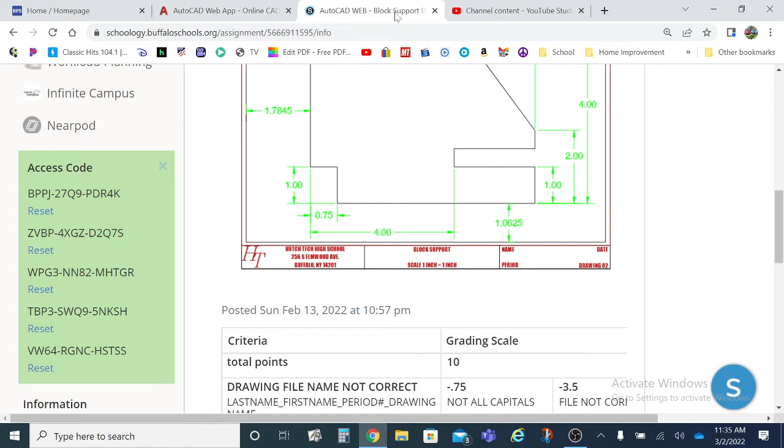First thing I'm going to do is use the offset command. I am going to reference two measurements. All right, all three of you, zip it. We are looking at these numbers here: 1.7845 and 1.0625.

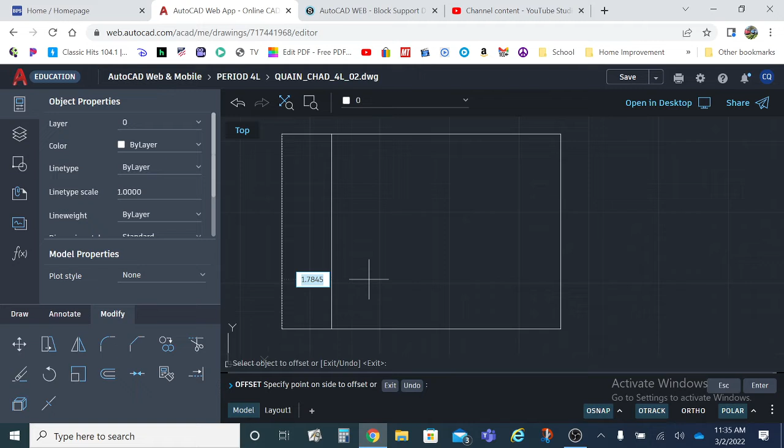I'm going to use my offset command. I'm going to type in 1.7845, enter, select my object, give it a direction, left click. Again, I'm screen recording this so you can always go back to it and look at it, okay?

Next I'm going to repeat the command. There's a couple different ways I can repeat the command. I can either right click and go repeat command, hit the space bar, hit the enter key, or simply select the item. I'm going to type in a distance of 1.0625, enter, select my bottom border, draw it upwards.

At this point, I am going to create the remaining parts to my object. So if I look here, I know my object is 6.25 units wide. How tall is my drawing? 4 units, okay? So I am going to go back to here. I just want to make sure OBS is actually recording, and it is.

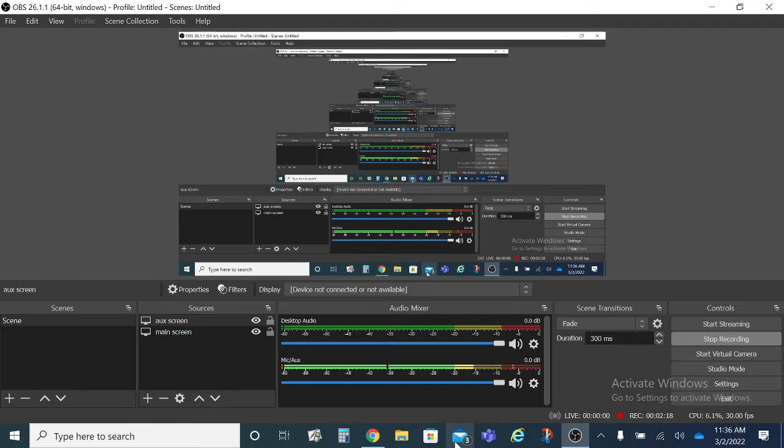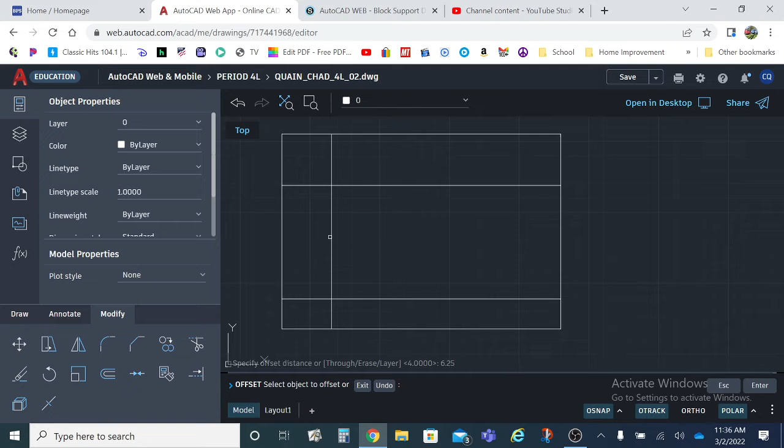So I'm going to go into offset again. I'm going to type in 4, enter, select my line that we already offset inward one time. And then I'm going to repeat the last command again, 6.25 this time, offsetting my vertical line that I've already offset one time. Confirm that.

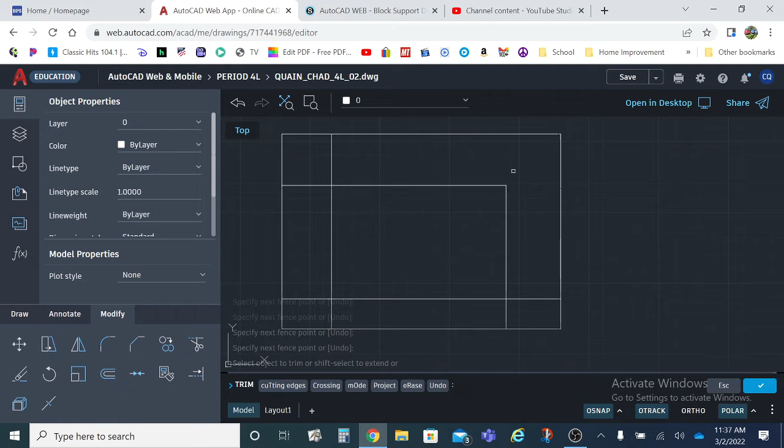From here, I believe I went into the trim command. So I'm going to show you guys a quick way to trim. Here's the long way: select the item, select the item. Shorter way: left click, hold, draw a line through the objects that you want to trim off. Right click, confirm. You can also hit the spacebar or the enter key to get yourself out of the command.

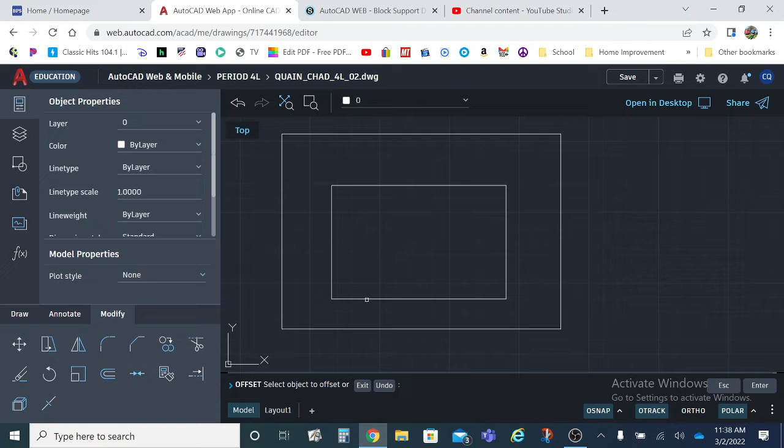Next I'm going to focus on this corner right here, where there is a 1 inch tall by a 0.75 notch that has been cut into the object. Again, what command do you think I'm going to use? Offset. I'm going to offset 1 unit because it's 1 unit tall. So I'm going to take my bottom object line and offset it upwards 1 unit.

Right click, confirm. Right click, repeat the last command for the drawing. This time I'm going to go 0.75 units long, offsetting it inward. So now I have this object here.

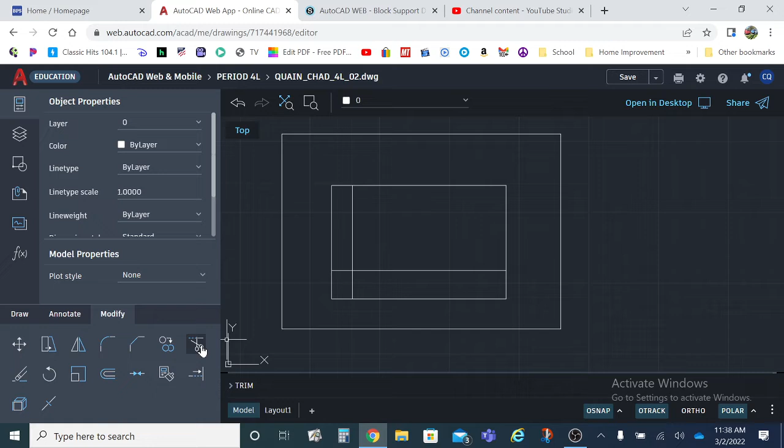What command can I use next? What was that, Pickle? What command can I use? Trim. Okay, was that Rosa? Yeah, all right, thank you Rosa. So I'm going to select the lines I want to get rid of. Right click, confirm. Now this is basically where we left off last time.

Went too fast, that's okay. That's why we're recording it, so you have a video of it.

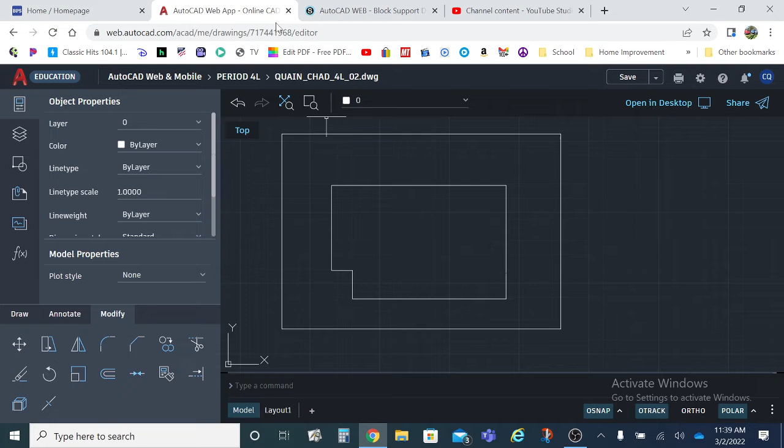Next thing that we are going to work on, let's take a look here. Let's take a look at this part right over here. Okay, you're going to notice a couple of pieces of information.

Pickle, no wonder you're falling behind. You're talking to Inda all the time. What? I don't know.

All right, so if you look over here, I want to show you guys a couple of things. First, you're going to notice that our notch is cut 1 inch tall. You're going to notice I have a reference that says that this point is 2 inches tall. But there are two problems. I have no information as to how tall this piece is here, and I have no information as to how tall this piece is right here.

Sometimes this will happen, whether it be on my level where I simply forgot to put the dimension in there. This happens in textbooks. This happens in the real world. Dimensions get missed. What you sometimes have to do is go back and use some common sense to try to figure out what the answer is.

So if I take a look here, I've got 2 inches, I've got 1 inch, so that's a 1 inch difference here. Let me ask you this question: does this piece here look to be the same as this piece here? The answer is they look pretty darn close to each other. So my guess is going to be that since all these numbers are pretty much maybe a quarter of an inch off of each other, these here are most likely going to be the same, just simply because there is no way that this and this are a quarter inch different from each other.

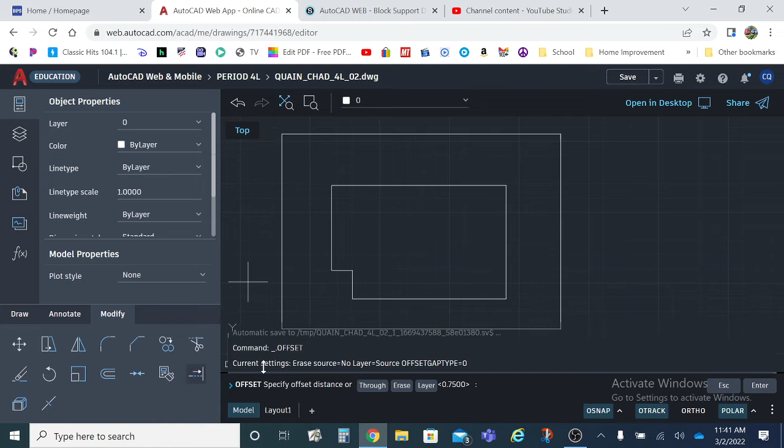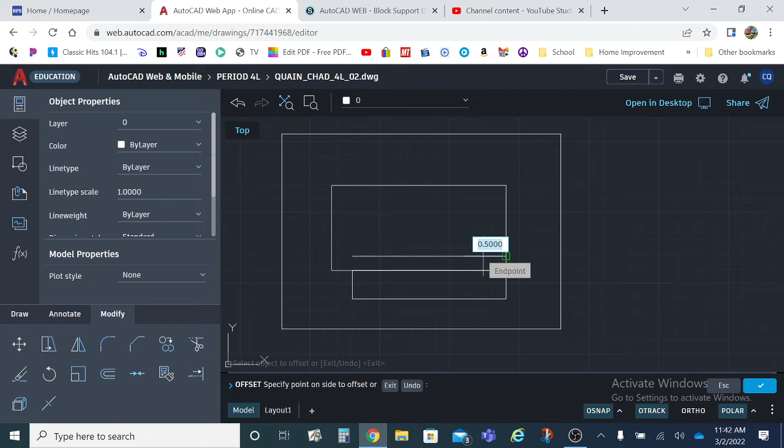So let's go back and offset 1, enter. Select my object, give the direction upwards, confirm it. Repeat the last command, 0.5, enter. Select my object, give it a direction. Reselect that object we just offset, give it a direction again. Right click, confirm it.

Now at this point, you're going to look at your drawing and you're going to notice something. You see right here, this 1 inch line that we offset originally? Right here, see that 1 inch offset there? Notice how it lines up perfectly with our 1 inch offset we just created? We could have probably not trimmed this line originally and just left it for future use. But since you guys are just learning the program and you're just starting to figure things out, there's nothing wrong with us offsetting again to create a new line. Later on, you can always start analyzing your drawings and saying, hey, maybe I could use that later on in the drawing. If you never catch on to that, it is what it is. It's just an extra step.

All right, so we're pretty good right now, right, Gavin? No? Gavin lost? Okay.

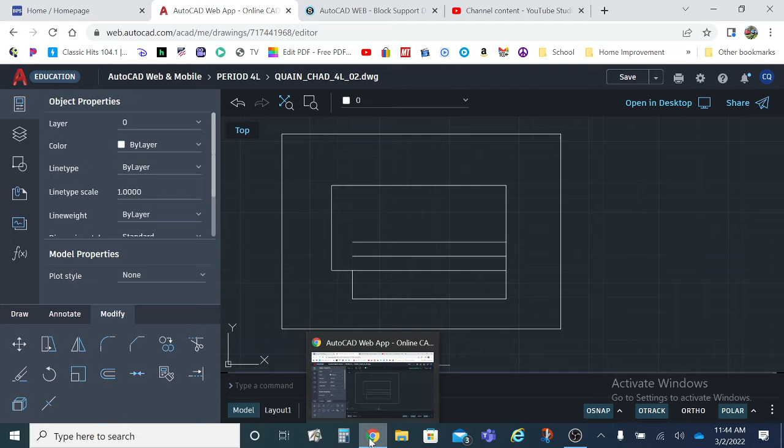So next, let's take a look right here. Let's take a look at our drawing, see if we can get some more information. Do we see a line right here? Yeah, okay. That line, if I follow it down, Gianni, what's my dimension for this line? That's the overall height of it, but what's the overall offset distance? 4. I find that right here. So I'm going to be using this line, offsetting over 4 units.

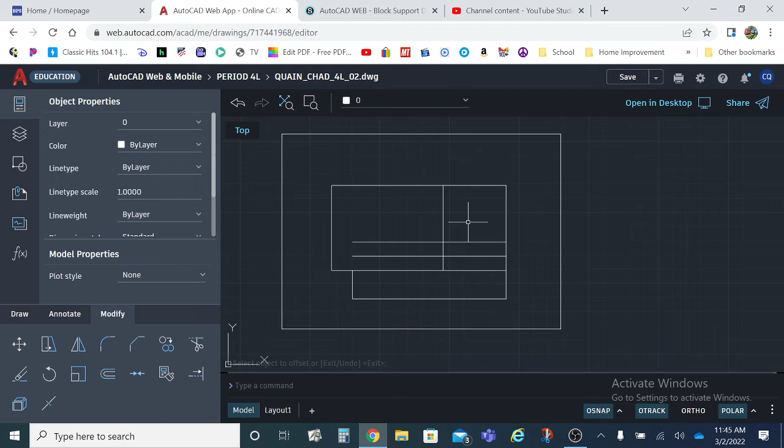Offset 4, enter, select my line, go ahead, offset it. Go ahead, confirm once you're done. Next thing I'm going to do is I am just going to go into my trim command, get rid of information I do not need.

So I got rid of all that information. Right click, confirm. Gavin's like, how in the world did he just trim all that stuff like nothing?

You can either select each piece individually and trim it off, or one thing you can do in the web version that I just found out is that you can trim an object down to nothing. Now I mentioned before that you can't do that all the way up until AutoCAD 2020, which is the most recent version I've used. You could not trim an object down to nothing. Possibly now in 2022 you could.

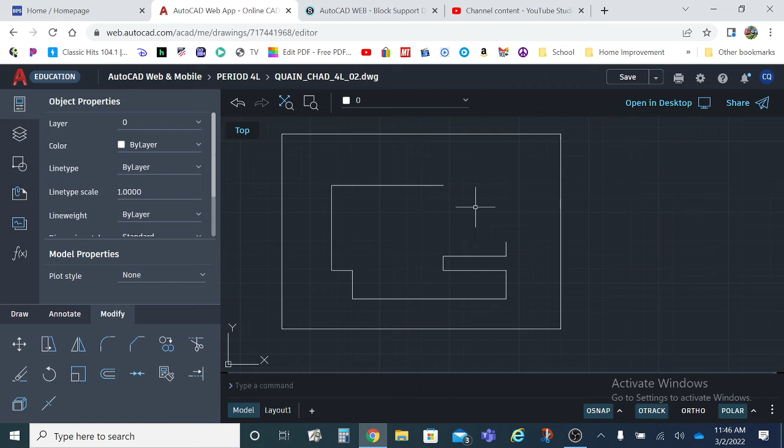Yes, sir. Looks good from here. Yep. Thank you, sir. Next thing.

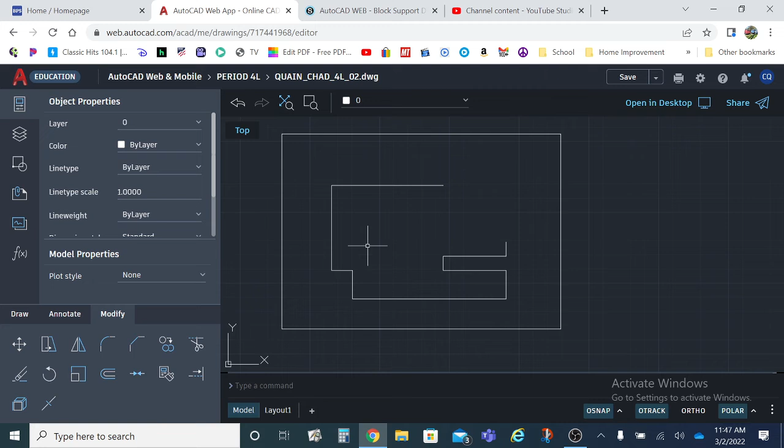I need to figure out where this top corner is because I know right now that this point is wrong. The reason why I know it's wrong is because I offset 4 units over and placed this here, and I trimmed up to that. So I know that that's wrong. But what I'm going to do is go back and look at my drawing, and I'm going to notice that I have a unit that says 4.75 that I need to offset.

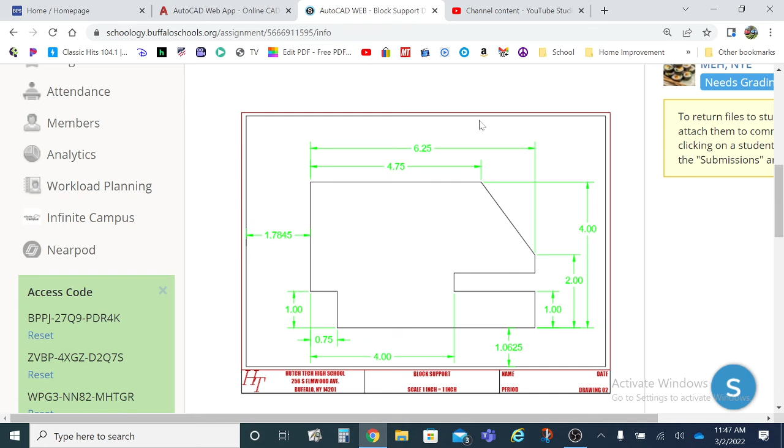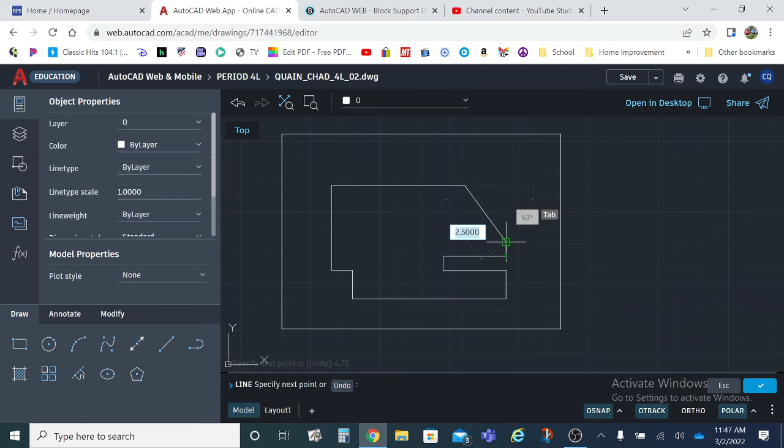Notice that this and this do not line up. So what I'm going to do is take this line here and simply delete it. I'm going to go into the line command, which is draw. Grab this endpoint here, draw straight across. Give it a distance of 4.75, enter. And then connect that down to my intersecting point just like that and hit confirm.

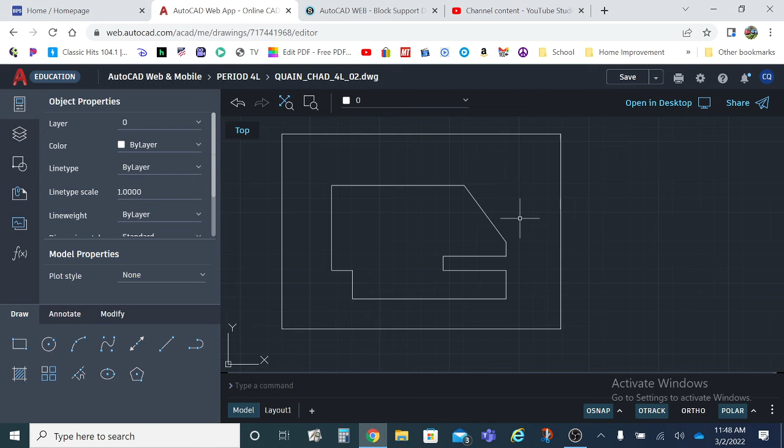Once you have your drawing done, hit save. Go to layout. Do a zoom extent on the whole thing. Then you're going to want to look at all of your text and make sure that it all looks like the fancy text. In this case, I'm looking and I see that my date is not the fancy text, so I'm just going to open it up and then close it right back down and it should update it.

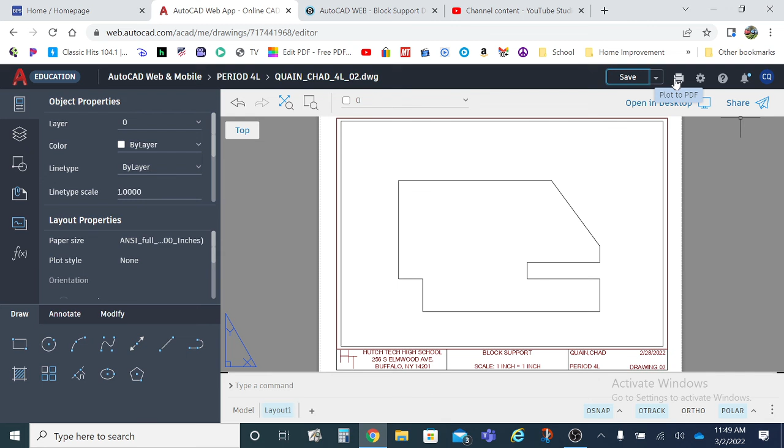This is important if you did a screenshot. It's not so important if you're going to do the following: I'm going to hit save, and then right next to save is the little printer icon. Hit print, and then it says plot to PDF. We're just going to go ahead and accept that. We are going to wait for the little green box to show up, which it does. I can now go download PDF.

At this point, two things are going to happen. You are going to see the drawing show up in your downloads. The file name is going to be correct: last name underscore first name underscore period underscore drawing number. You can then upload this to Schoology. You're going to notice that when the PDF generates, it's going to put after your title of your drawing, it's going to put the following information: it's going to say layout 1. I don't care, just leave it. Upload it and call it done.

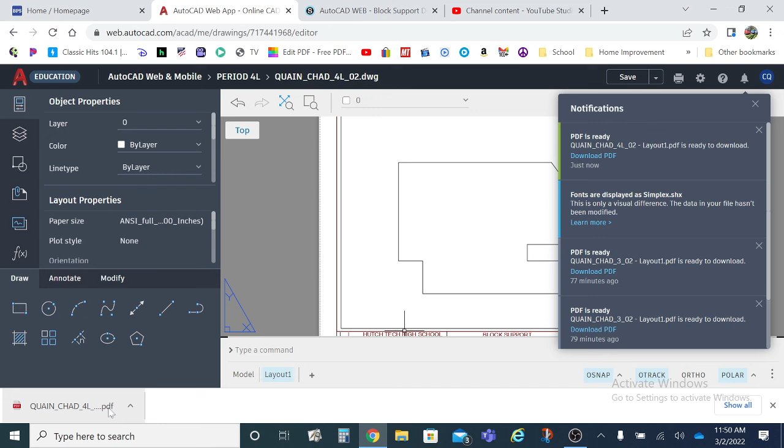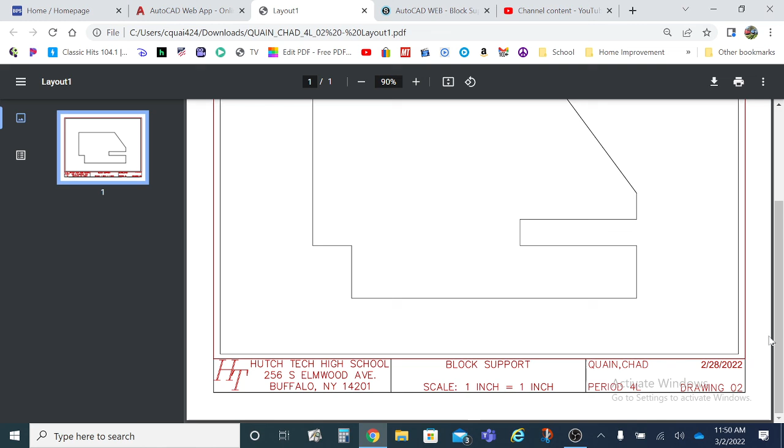But what I want you to do before you upload it is open it and verify that everything looks correct. In this case, everything looks correct, so I can go ahead and submit that. If something doesn't look right, obviously go back to your drawing, fix it, save it, and then resubmit it. Got it? All right, so tomorrow...